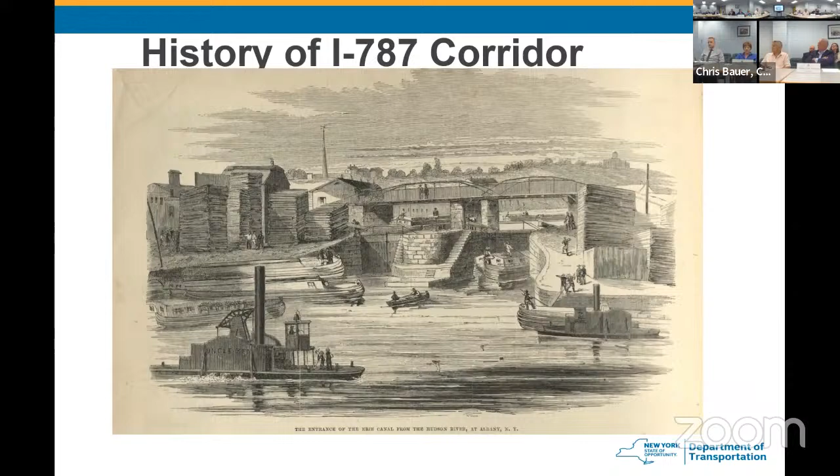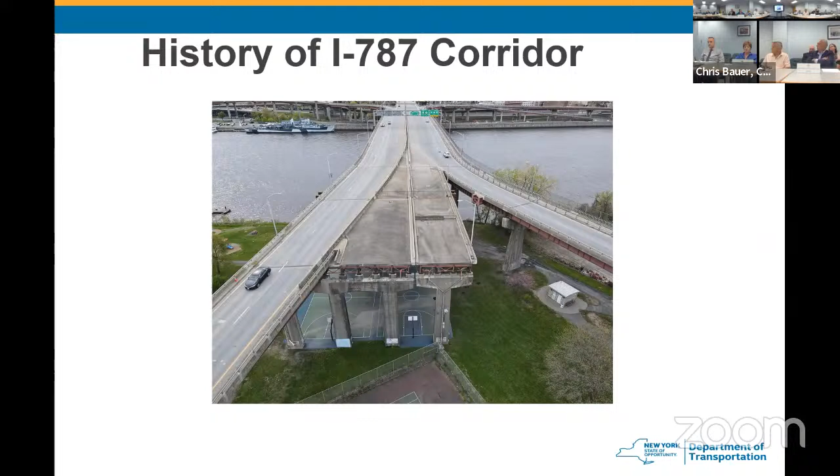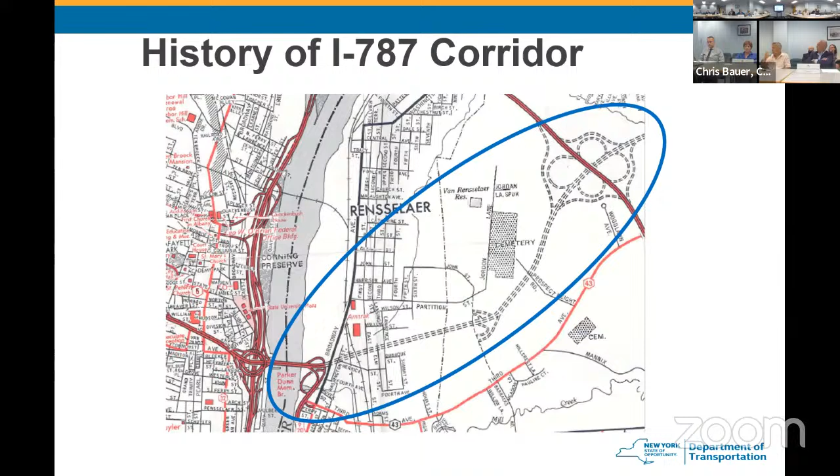787 is steeped in long transportation history, from over 200 years ago with the Lock 1, moving on a couple hundred years later to railroad transportation, and on to today what we all know as 787 and the Dunn. I show this picture as part of the history of why the Dunn was built the way it is. Our famous stub into Rensselaer was intended to connect to an arterial out to I-90. In addition, there were various plans within the city of Albany for other arterials, some of which were thought to go underground. I lay all this out for context of how something was built that just seems like the capacity is way beyond what it ever saw — because of these bigger plans in the area that never came to fruition.

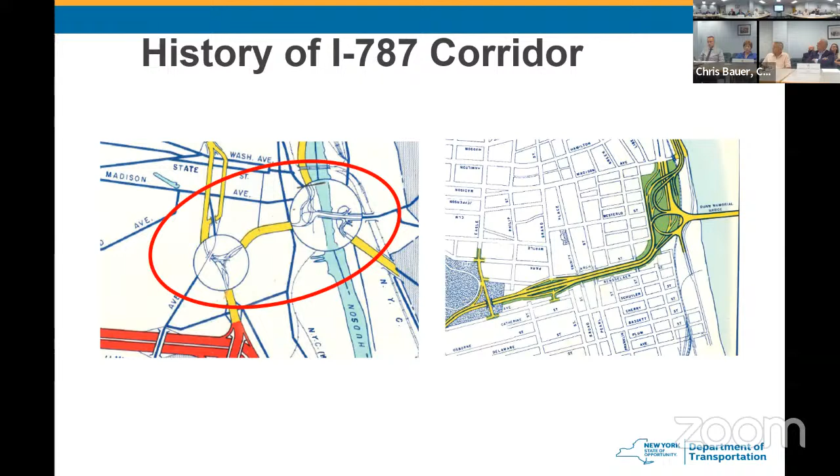Those comments and the infrastructure condition and status all feed into the purpose, needs, and objective statement. This is all proposed and will all be vetted through the report. At the end of the report, it's going to remain a proposed purpose, needs, and objective statement all the way until an eventual EIS is started. But we vet it now so that it feeds right into the future processes seamlessly.

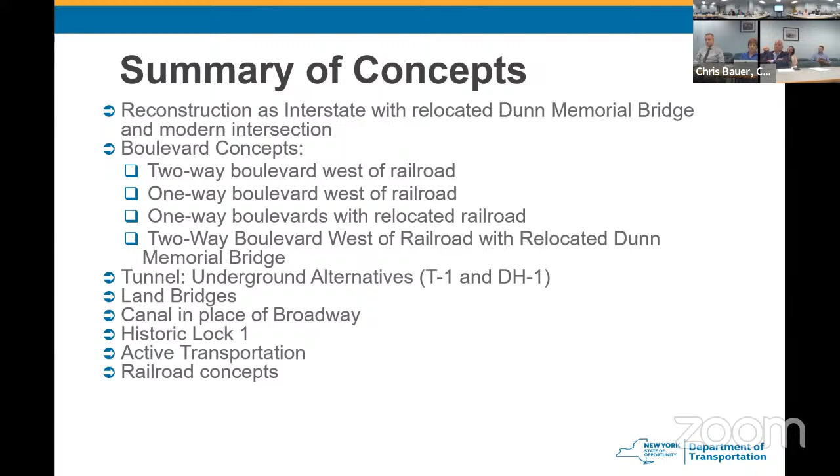Now onto the concepts, the meat of the presentation. Here's a list of them that we're going to run through, but I might as well get to the concepts as they are. I did skip over the null alternative and rehabilitate-as-is, because that's what we all know is there, so I'll skip over those.

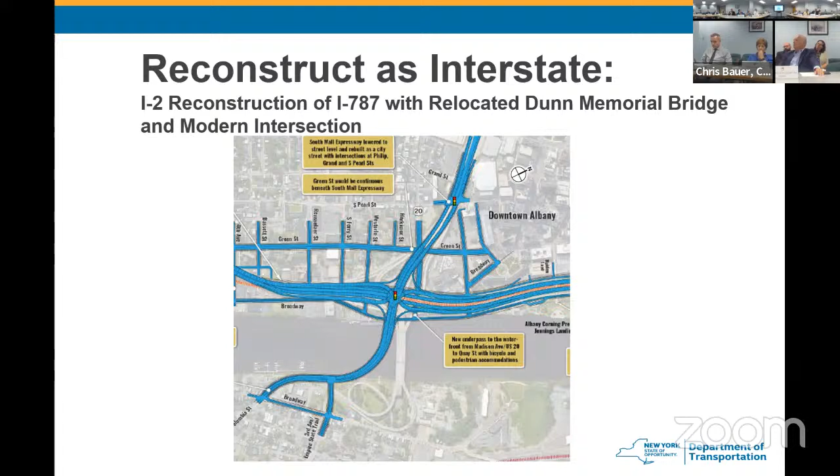This is the first reconstruction concept, to rebuild I-787 as an interstate, in theory meeting or upgrading to existing design standards. One key feature here is that by replacing the Dunn Memorial, this option shows a single point urban interchange, which would collapse the stack into a single plane — still elevated, but much lower. This then leads to the South Mall Expressway running downhill and touching down at grade at Pearl Street, becoming a boulevard for two city blocks between Pearl Street and the Empire Plaza. That's a key feature in this concept that carries through, in some form, into the future concepts I'll discuss.

4 boulevards. In this first one, we call it 2 ways west of the railroad. This would take all of the highway infrastructure and move it to the city of Albany side of the railroad, and create a boulevard on that area.

This, of course, does free up what is there today on the waterfront side. It would also move the Dunn Memorial, I dare say the least amount, just to the south. And some other interchange configurations shown here to try to get after reducing the footprint.

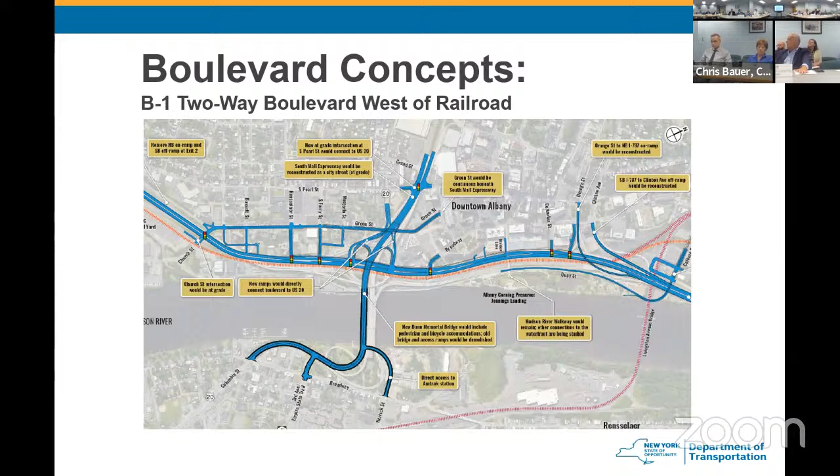Obviously, this would be signalized with much lower operating speeds. Boulevard 2, this one in theory would convert Broadway. The key feature is where Clinton Avenue comes out near the Albany Skyway, and then would turn all southbound traffic left on Broadway, converting that to a one-way street. So it's basically a one-way pair where southbound is one block away from the northbound direction.

So this one has some advantages but also some disadvantages. We wanted to show various iterations of boulevard concepts to get all parties' reactions to these. This one, again, only moves the Dunn Memorial a little bit to the south. And again, the key feature, same as the previous boulevard, is the interstate—the South Mall Expressway would still touch down about Pearl Street.

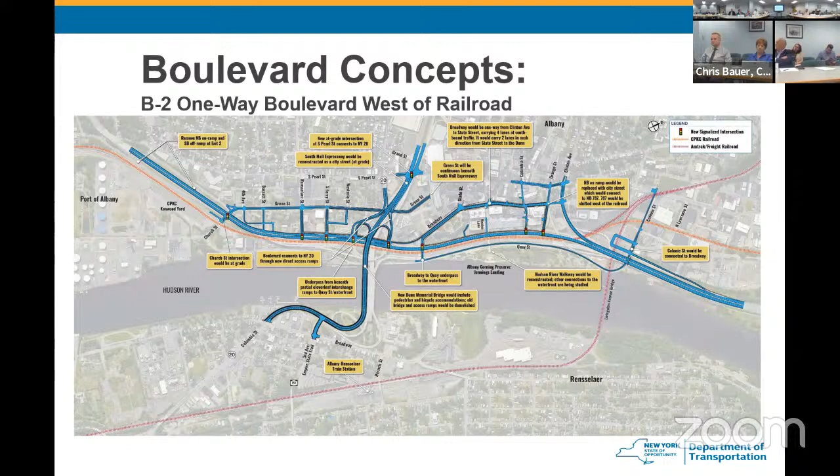Boulevard 3 is the only concept where we show the railroad removed from the corridor, and I'll get to the challenges of that next. But in theory, we placed the north and south bounds about, I'd say, a partial city block apart from one another for theoretical land uses in between the boulevards.

And the thought there is, if pedestrians are going to cross the boulevard, it would be a much improved situation if they could cross one bound at a time and then have some distance of refuge in a city setting before crossing the other bound direction.

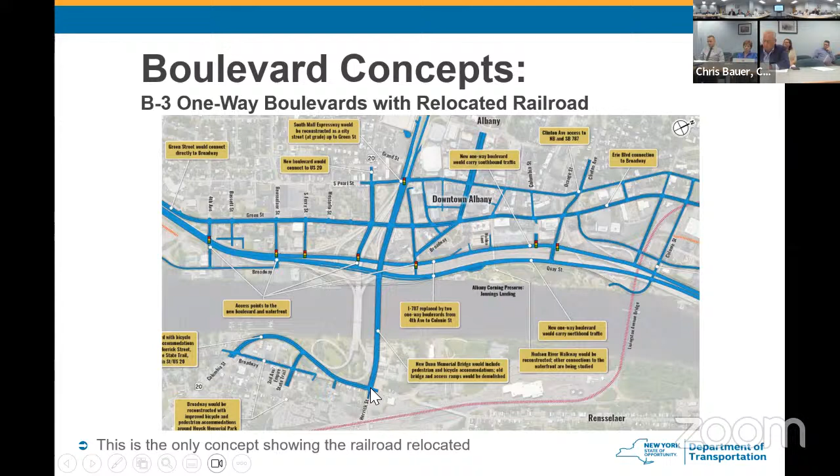So that's Boulevard 3. And this one, we actually show the Dunn Memorial moving slightly north and in theory tying into the road straight to the Amtrak station. But of course, the pesky part of Boulevard 3 with no railroad is, how do you end up with no railroad?

And the answer is that nothing in the world is impossible. This is probably the most challenging item to implement, based on the railroad's existing footprint, their right of way, and their operations.

The railroad has indicated they do not want to move, because the route they have now is very functionally beneficial to their network. Even in theory, building them an entire track back to their own system in Schenectady is still an impediment and a highly undesirable outcome for the railroad—never mind the expense and effort to construct a parallel track all the way.

Did someone have a quick question, or I can make it to the end? Nope, you can keep going. All right, cool.

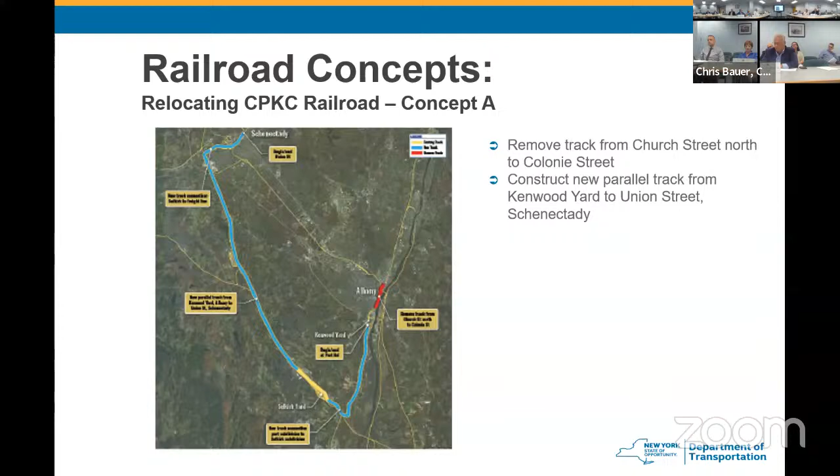Again, trying to avoid putting new infrastructure immediately adjacent to neighborhoods, specifically the south end. This concept solves a few of the traffic problems while separating the city of Rensselaer traffic from the South Mall Expressway traffic. It makes operations work more efficiently in the corridor.

And as you can see on both sides of the river, this would free up vast amounts of waterfront and remove the stack of ramps on each side of the river in this scenario. The thing to note is the area around the existing Dunn and all the way to the South Mall—all of that area would all be at grade in this scenario.

There'd be nothing elevated. You wouldn't pick up elevation until you approach the Port of Albany to get up and then go over the river.

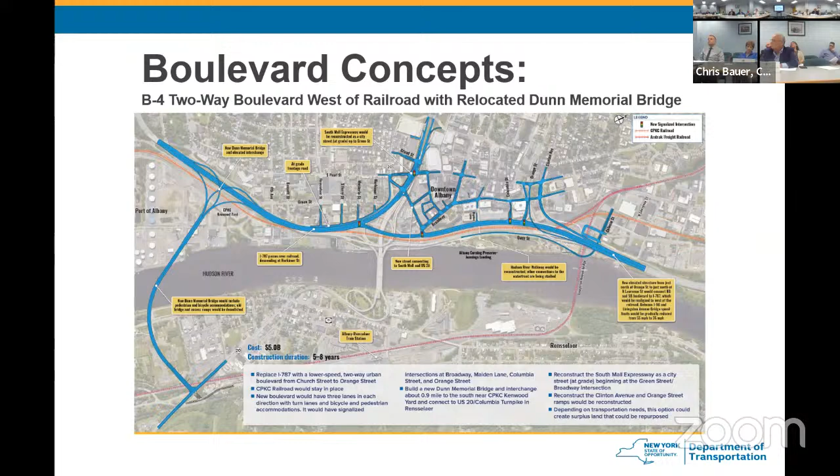But most zones are 3 minutes or 4 minutes or less of a travel time change. And that's encouraging to be in the single digits of projected travel time changes in the year 2050.

This isn't even day one travel time change—this is 2050 compared to the null. So it's encouraging traffic modeling, and the partnership with CDTC to share their model with the consultant to be able to run all this has been very helpful.

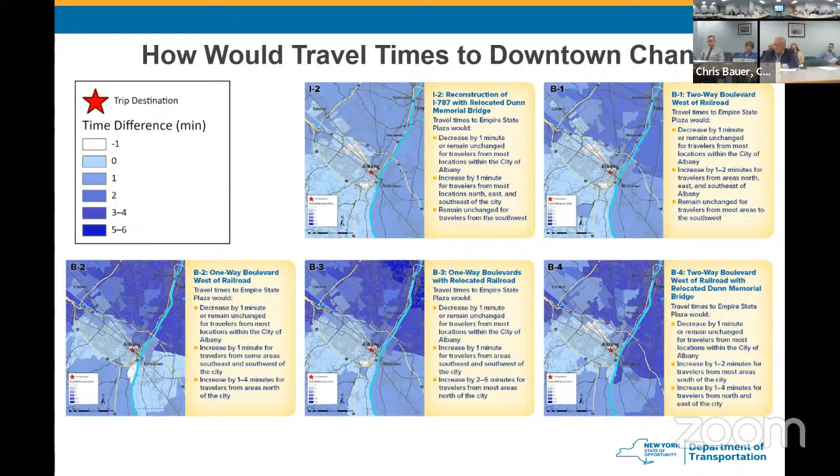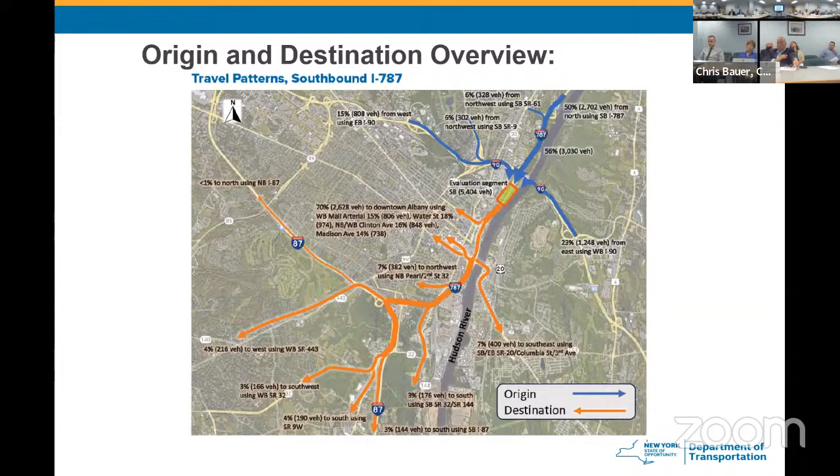Another thing we utilize the analysis for is origin and destination, to understand where traffic's going and coming from. As traffic enters the corridor from the north, this shows that 80% of it exits within the city of Albany or goes to the city of Rensselaer, with only 20% making it out the south end of the corridor. There's a similar northbound graphic on our website, but I figured I'd illustrate one, because this drives the conversation around the desired tunnel, which we heard a lot about leading into the study.

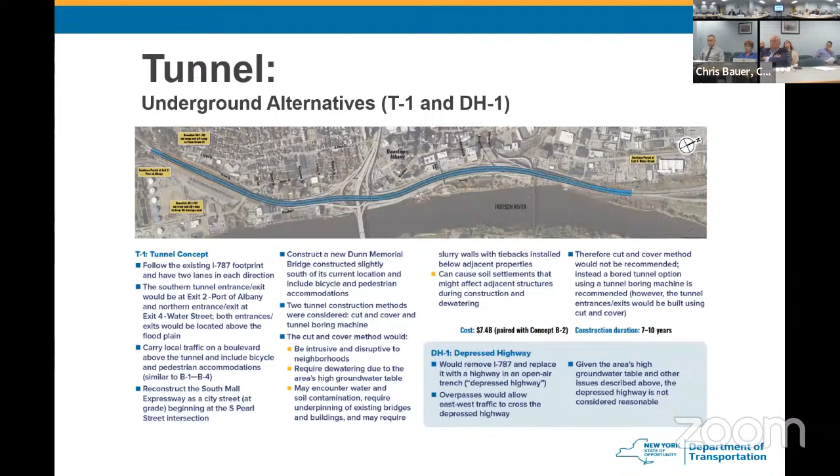Well, the tunnel is very expensive, regardless of the feasibility of water tables and resources you'd impact. If it only takes 20% of the traffic off the system, you still need a whole surface street network to handle the 80% of traffic going to both cities on each side of the river. And never mind a $7 billion plus cost estimate.

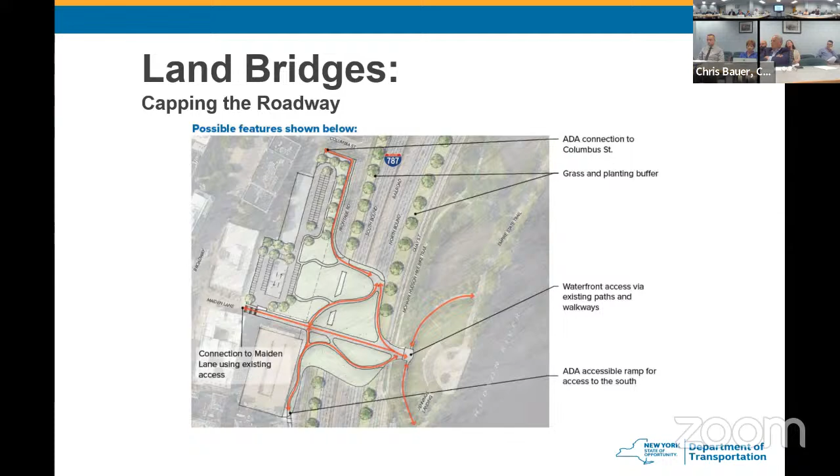So then the next concept that is very popular and common is to create land bridges. If we can't eliminate the railroad from the corridor, and you have to get across it somehow in a separated grade regardless, these land bridges are very wide pedestrian bridges that can feel more like a park than a bridge. These could gain traction to get pedestrians across traffic with zero interaction with vehicles, whether at a signal or not. It really is true that if you simply separate the pedestrian crossings, that is the absolute safest option.

I'm only showing 2 of the 3 land bridges that we cooked up. One up to the north near the existing pedestrian bridge at Jennings Landing, and this other idea down around the USS Slater. These are just early layouts. Obviously, as things evolve, the layouts can change, depending on what the exact built network could ever look like.

One question for the public as we get the word out is, are you in favor of these locations we've shown? Are there other locations we should consider? Things of that nature are what we're looking for feedback on.

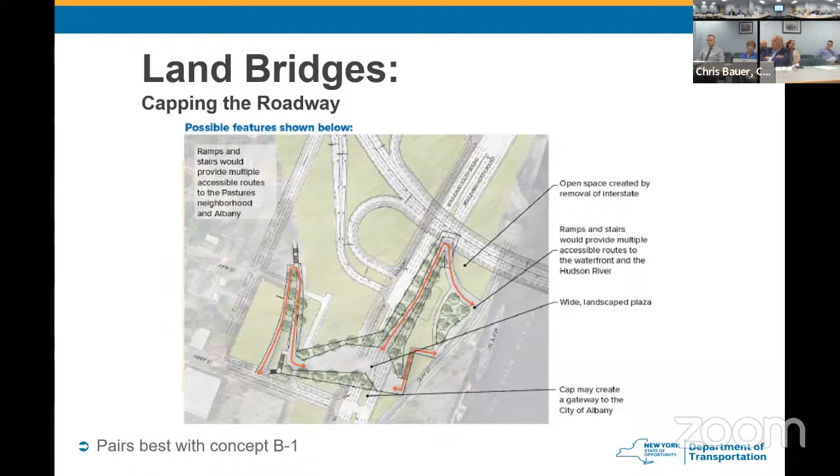Another common comment was about building a waterway canal into the city of Albany. Our friends at the Albany Waterway Group continually use their motto of, instead of bringing the city to the river, bring the river to the city. So we did want to draw that option up for illustration.

There are some notes we put on the boards that illustrate some of the challenges to this concept, including a water source, because you need an upper pool or area on Broadway, since it's 26 feet above the Hudson River, and you need a lock at each end to get up and down, or in and out of the city.

A couple more challenges: the creation of a canal instead of a city street would mean the traffic would have to be dispersed further into the city on the network, and improvements to other city blocks would be needed to handle traffic. Or we're backed into an interstate simply handling the traffic in the existing configuration in a sort of perpetuity scenario.

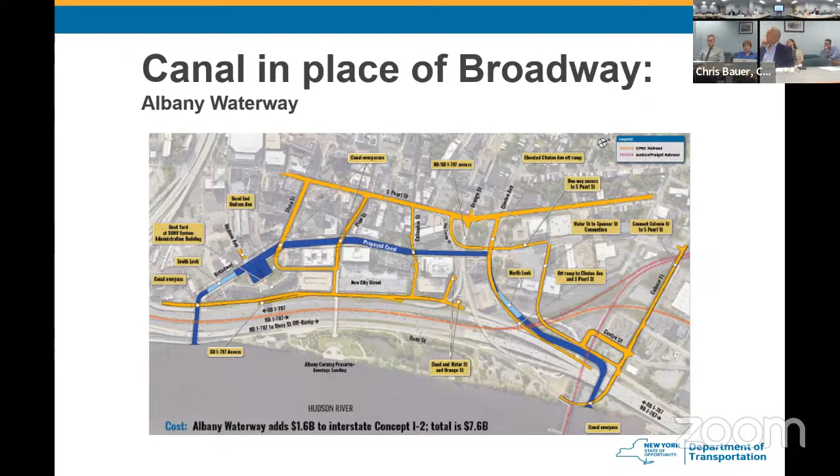In a smaller ode to canal ideas, this is one option of three we drew up down at where the old lock one was, from the sketch I showed earlier. This is a theoretical small basin, an inner harbor down around lock one, in the shadow of the central warehouse, which fortunately someday may not cast a shadow, I understand.

So this is one idea. There were some other iterations of making it a smaller park in honor of the Lock One Canal, but all things we cooked up out of commentary and public input.

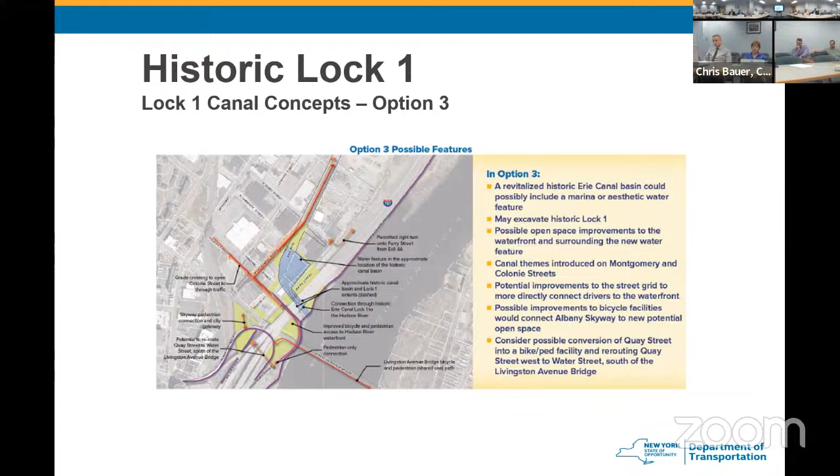So that's the major concepts we touched on. We also have concepts up in Watervliet and Menands to provide better access. There's the Menands 16th Street connector to the Hudson Shores Park that we've drawn up, which seems to get some positive feedback. A long desired connection for Watervliet to the Hudson Shores Park, as well as some little river ideas in the village of Menands. We're discussing these things with all parties these days to figure out feasibility and the like.

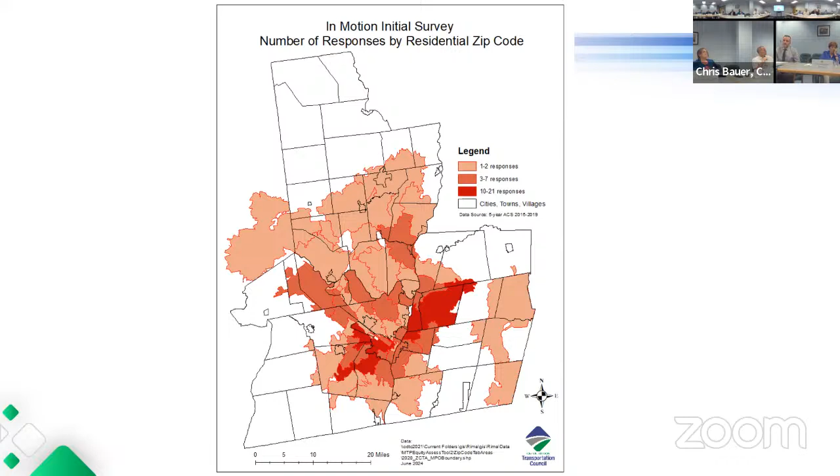This is just the distribution of the responses in the region, the darker red being more responses and the lighter pink being less responses.

We asked them to identify places that they like, places that they find easy or pleasant to get around. A lot of the places mentioned were places you might imagine, like New York City, Washington DC, Boston, Portland, Burlington, all the European cities you can probably imagine were mentioned at least once.

But there were also some local places mentioned that I wanted to highlight, mentioned several times, including the city of Albany, the city of Saratoga Springs, the city of Troy, and the downtown area of the Delmar area of Bethlehem, which I think is an interesting observation, as those are all urban places.

So now I'm going to move into talking about the draft goals and objectives. And I think the important thing to really note here is that these are draft. This is a starting point, not the ending point. We're expecting to change these. But today we're going to present them and then ask for you to release these to the public.

We developed these using highlights and findings from our regional trends report, the input that we got from the public, state and regional plans and policies that we are supposed to be following, reviews of our previous plans, and of course input from our In-Motion task force and from our planning committee.